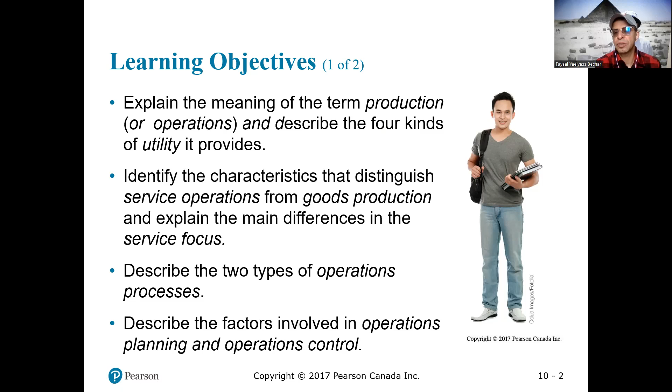Excuse me. We will describe the two types of operation processes. We're also going to describe the factors involved in operations planning and operation control. Further, we will be explaining the connection between productivities and quality. We try to understand the concept of total quality management, TQM, and describe the 9 tools that companies can use

to achieve it. And also we'll explain how a supply chain strategy differs from traditional strategy for coordinating operation among businesses. Now, creating value through production.

Operation management. It's a set of methods and technologies used in the production of a good or service. So it basically is a set of methods and technology used in the production of a good or service. Service operation, which is most of it in Canada, service operations are production activities that yield tangible and intangible service products. Goods production, on the other hand, is a production activity that yields tangible products.

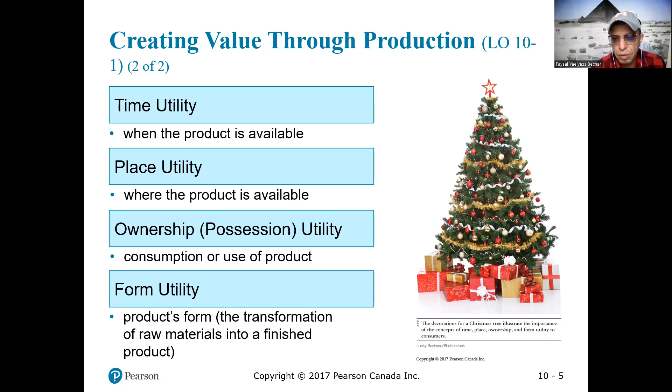Now, the difference between services and manufacturing operations: the level of interacting with the customer. Also, the service can be intangible and unstorable. The customer is present in the operation process. And also the service quality consideration. Intangibles make all the difference here, the service quality consideration.

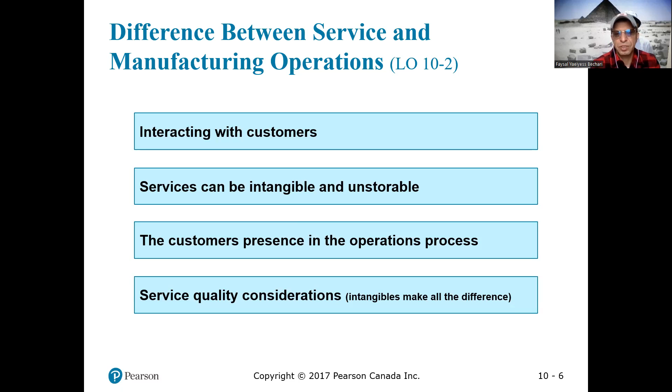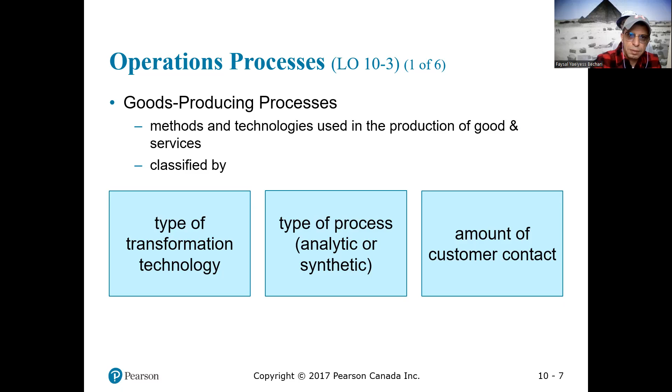In the operations processes, goods producing processes is a method and technology used in the production of goods and services, classified by types of transformation technology, type of process, such as analytical or synthetic, and the amount of customer contact. Now, the types of transformation technology we have: the chemical processes, the fabrication processes, the assembly processes, the transportation processes, and the clerical processes.

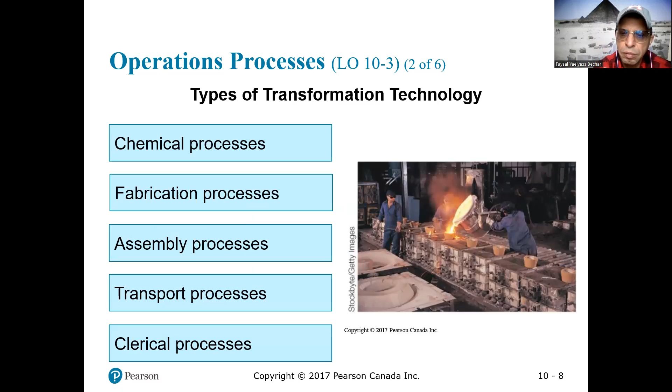But what's an analytical process? Resources are broken down in the production process, extracting minerals from ore, for example. Synthetic processes are where resources are combined in the production process, like paint production.

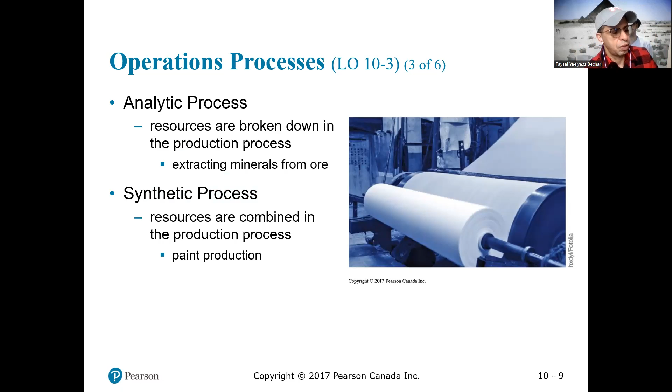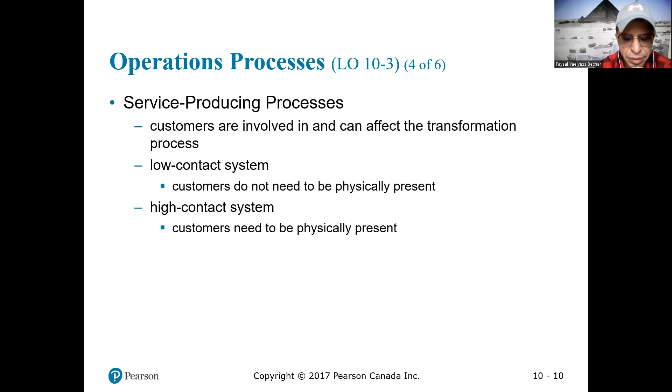You see here in the hairstyle operational processes, the hairstyle service being provided to this customer is classified as high contact, because he or she will be part of the operation, cutting hair and fixing up everything. This service also illustrates the three key features of service operations, which are intangibility, customization, and unstorability.

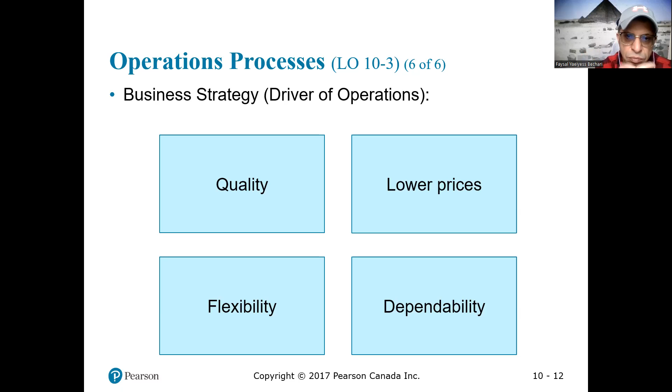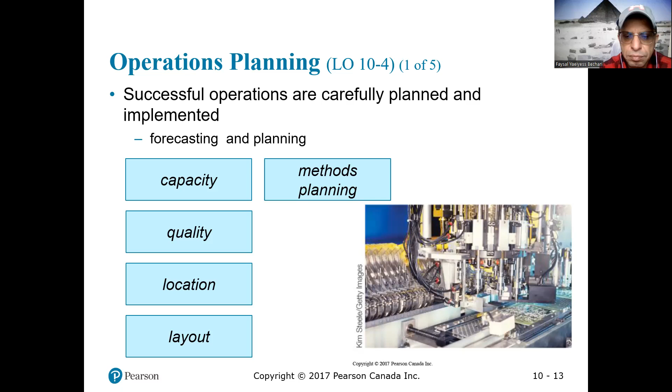Business strategy, which is the driver of the operation. It could be quality, lower price, dependability, and flexibility, or a combination of these. Successful operations are carefully planned and implemented, and they use forecasting and planning, usually, as you know, and they take into consideration capacity, quality, location, layout, and methods planning. I'll explain each one of them.

So in operation planning and control, you start with the business plan, as you see here, business plan and forecast, and then long-range operational plan like capacity, location, layout, quality, method. And then you start the operation schedule like master production schedule or MPS, detailed schedules, staff schedule, and project schedule.

And then you have operation control, which is quality control, materials management, and output to the customers. And then you would check that. And if you need further operations or further scheduling, the business adjusts according to the information fed back from output to the customer.

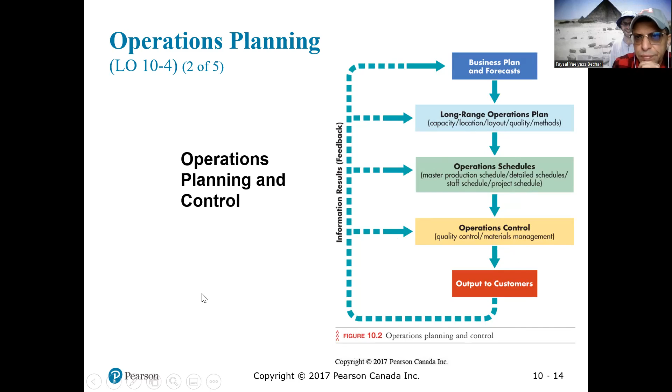Now, in capacity planning for goods and services, the amount that a firm can produce under normal conditions, that's the capacity. So the capacity always slightly exceeds the normal demand. It also accommodates seasonal changes and peak times, and addresses ways to use excess capacity.

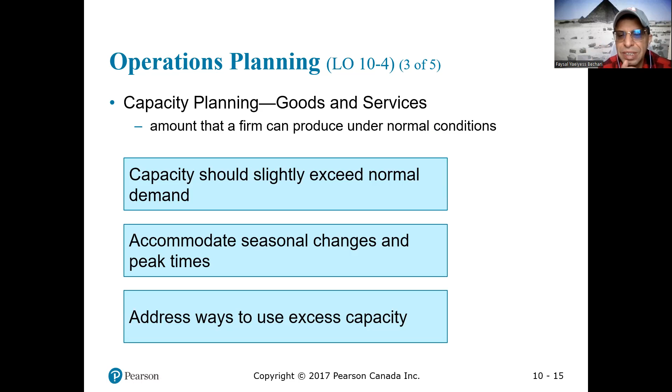Now, there is layout planning, which includes a process layout, where equipment and people are grouped by functions. And then you have a cellular layout, which is used when families of products can follow a similar flow path. And then you have a product layout, which is organizing equipment and people to produce one type of product, like assembly lines, industrial robotics, lean manufacturing.

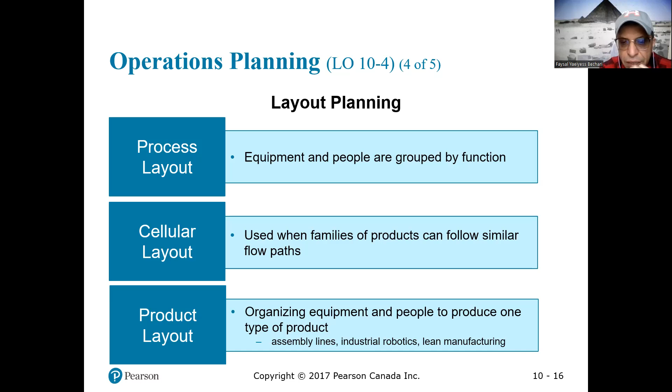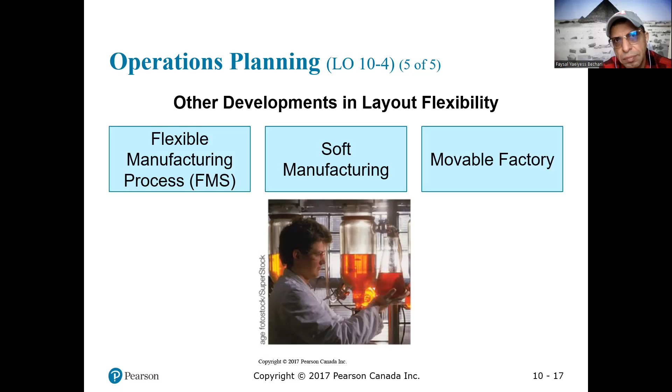Operation schedule. Scheduling goods operation, you need what you call MPS, master production schedule, on the top level, which indicates which product, when, what resources, and what time. Then the scheduling at the lower level, which is a scheduling service operation, which if it has low contact, is based on desired completion date and or arrival. And then you have high contact, where customer is directly involved, impacting the scheduling itself.

Now, the scheduling is always driven by or monitored through different charts. One of them is called the Gantt chart. It's a diagram of tasks in the project and time required for each task. Can be used to check the progress, and this is an example of a Gantt chart.

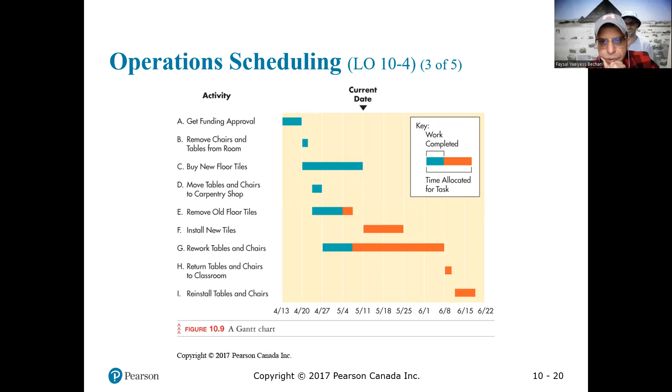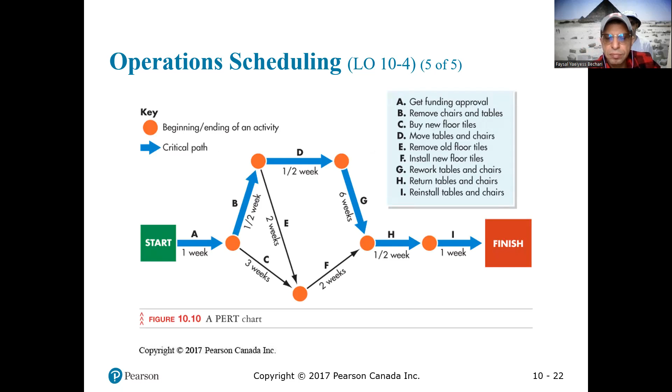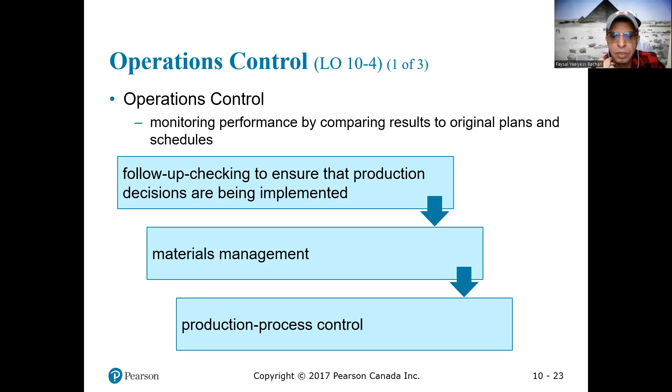Then what do you have? Operation control. It's about monitoring performance by comparing the result to the original plan, benchmarking and scheduling. That's done through follow-up checking to ensure the production decisions are being implemented, material management looking at it, and production process control.

The material management is about transportation, purchasing, inventory control, warehousing, and supplier selection. It's about planning, organizing, and controlling the flow of material from purchases to distribution of finished goods. And all of that is considered to be inventory, by the way.

Now the tool for process control, under operation control, is you provide worker training. You try to implement just-in-time production system everywhere, material requirement training on how to use these materials, and last but not least is the quality control or TQM. You seek TQM after the quality control.

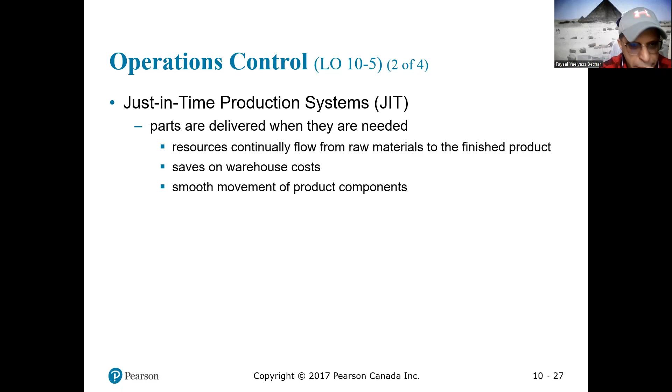Now, just-in-time or JIT production: parts are delivered when they are needed. Resources continually flow from raw material to finished product, saving on warehouse costs and smoothing the movement of product components. These are the three things we speak about.

Just-in-time production, we can see it done in Honda. It's a type of lean manufacturing that brings together needed material at the precise moment they are required for each stage in the production process.

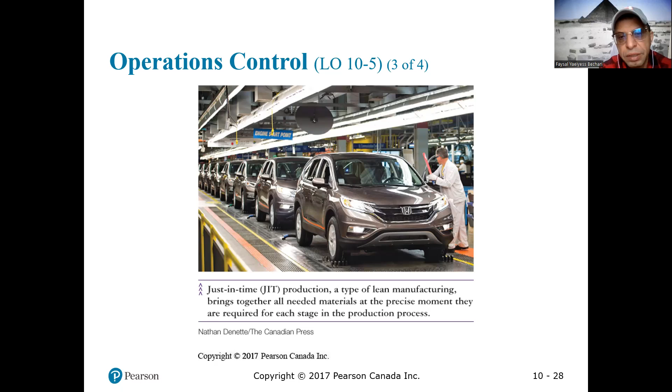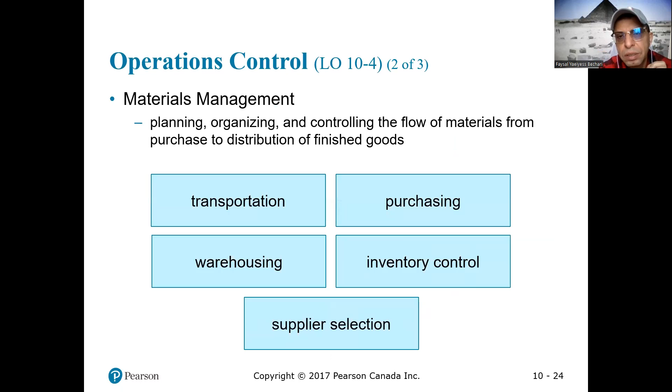Then you have what you call MRP, which is connected to the first plan, the MPS. MPS is integrated with MRP usually, and MPS is driven from the ERP.

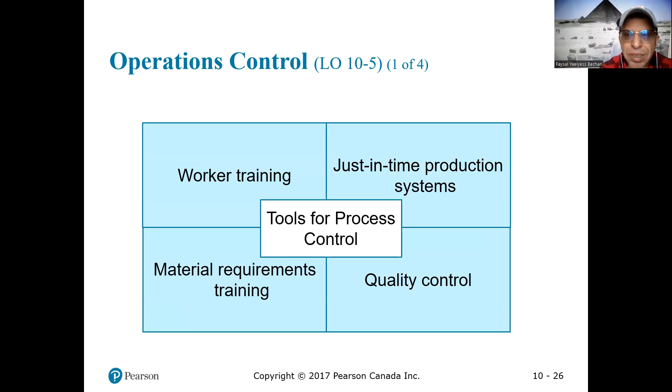Then you have the MRP, which is material requirement planning. It's a computerized bill of material for estimated production needs. This is really set up by the engineers. Resources are acquired and put into production only as needed.

That's the MRP. Then you have what you call MRP2, or manufacturing resource planning, which is different than material requirements planning. But actually all of them fall under one MRP. It's an advanced version of MRP and ties all parts of the organization into production activities.

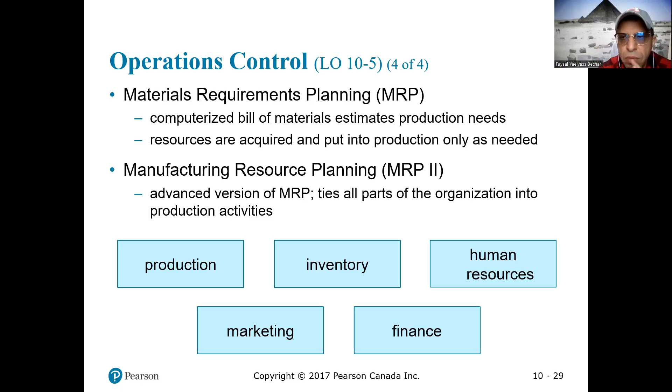So MRP takes into consideration the production. It's a scheduling in a way of production, inventory, human resources, marketing, and finance.

Then you have what you call quality. That is something we hear a lot about. A product's fitness for use in terms of offering the features that the consumer wants. That's what you call quality.

Measuring productivity is different from quality. Productivity is measured as a ratio of output to input. Often they use labor for input because the data is easily available. So for labor productivity, we use GDP, or gross domestic product, of how many produced divided by the total number of workers.

Now you have what you call domestic productivity. Domestic productivity affects the standard of living, like employee wages, investor profit, and customer prices.

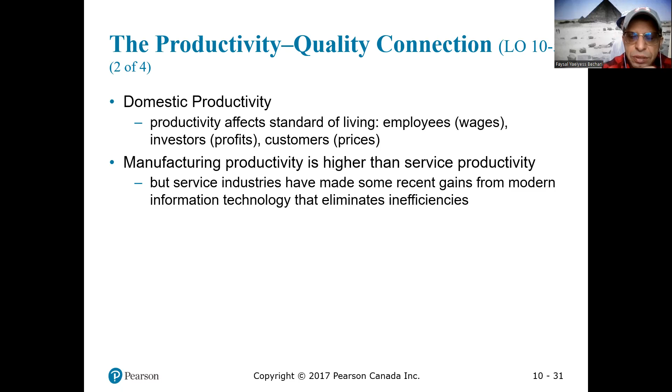Manufacturing productivity is higher than service productivity in general. But the service industry has made some recent gains from modern information technology that eliminate inefficiencies. Here we look at

Many jobs like this are outsourced to service suppliers in India because workers there receive lower wages than their North American counterparts, used to be. This translates into higher productivity since the costs are lower doing it. This is true, but when you reach higher consultancy and high-end consultancy, it becomes almost the same prices.

Productivity between industries differs widely. Agriculture, computers, steel gained from new technology. There are different productivities, impacted by labor union negotiation, investors, and suppliers. These are all things we can discuss regarding the effect on productivity.

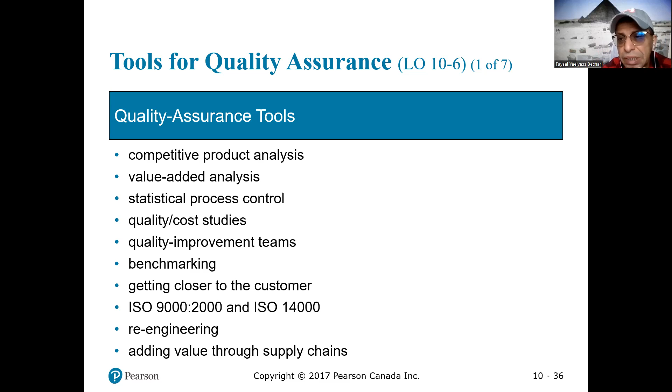Now there are different tools for quality assurance, like competitive product analysis, value added analysis, statistical process control, quality cost studies, quality improvement teams, benchmarking, getting closer to the customer, ISO 9000, ISO 14000, re-engineering, and adding value through the supply chain. These are all quality assurance tools.

In value added analysis, for example, we're looking at an evaluation process to determine the value added by all work activities, material flow, and paperwork. It also reveals and eliminates wasteful activities. So we evaluate all these three steps, then reveal and eliminate the wasteful activities.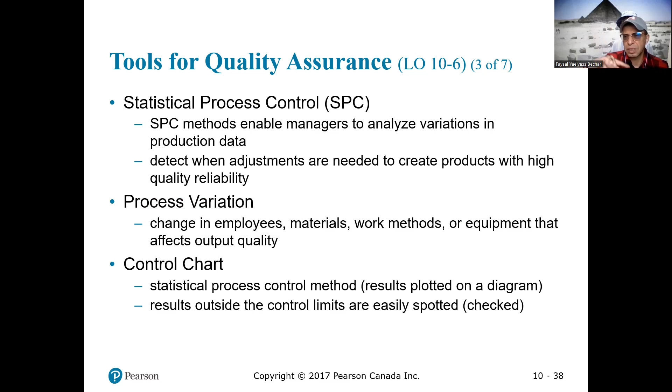And then you have the control chart, which is a statistical control method where results are plotted on a diagram, and results outside the control limit are easily spotted. So there's a control limit and a spot on it that's outside the limit.

Continuing with tools for quality, we have quality cost studies, which assess quality related costs and identify areas with cost saving potential. Quality costs are associated with making, finding, repairing, or preventing product defects. This requires determining the cost of internal failure and external failure — what costs occur after production if something fails on-site or off-site.

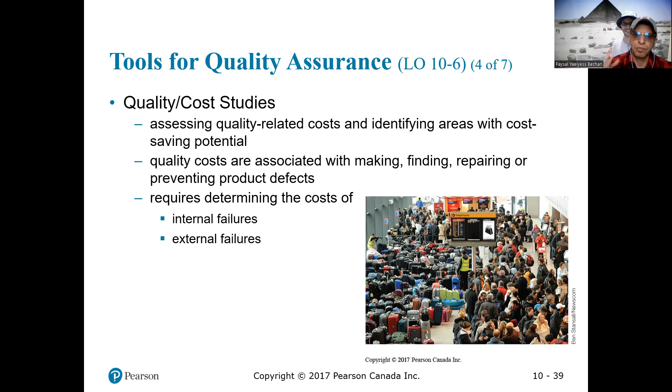Now what do quality improvement teams do? A group of employees from various areas meet to define, analyze, and solve a quality problem. Basically, their goal is to improve work methods and products. This is very applicable in Germany a lot. It may involve brainstorming, discussion, and the use of quality cost studies that the company collects.

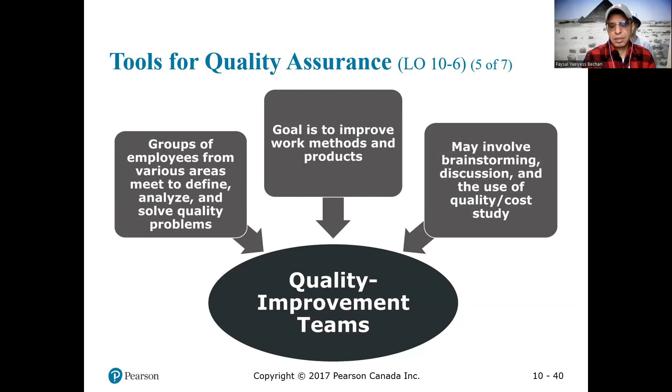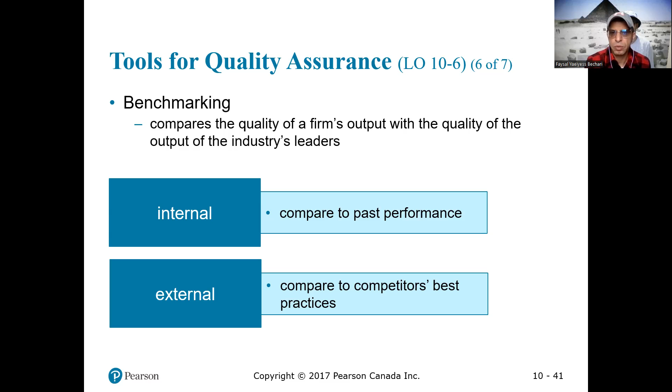Then you have benchmarking, which is an important field for analyzing. In benchmarking, you compare the quality of a firm's output with the quality of the output of industry leaders. Now there's also internal benchmarking, which compares to past performance, and external benchmarking, which compares to competitors' best practices.

ISO 9000, ISO 14000 is basically product testing, employee training, record keeping, correcting, and it's used to earn rating for firms, measured by a qualified consultant, or it can be done personally within the company. It's a program certifying that a company meets the rigorous standards of the International Organization for Standardization, ISO.

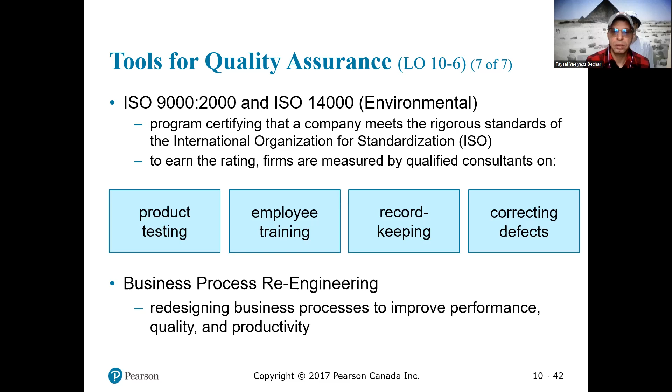Then you have business process re-engineering, which is redesigning business processes to improve performance, quality, and productivity. Then you have the supply chain, or value chain — in that process you add value through the supply chain. You look at the supply chain and try to add value. It's a group of companies and a stream of activities involving getting the product from raw material to the end consumer. That's the supply chain.

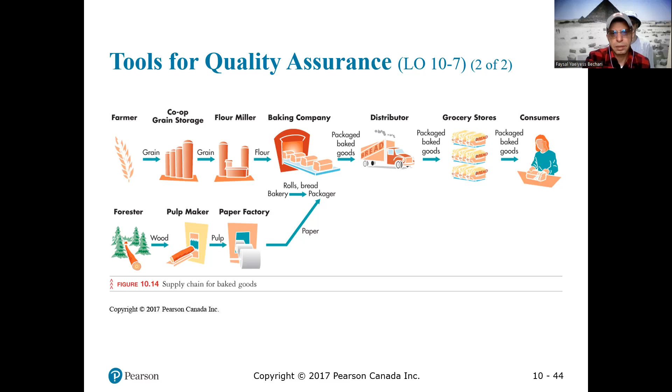We can take a look at this. In supply chain management, it offers a competitive edge because companies are working together to improve the flow of goods. The customer gets a better value, smooth flow of accurate information, reduced unwanted inventories, and materials move faster to business customers and consumers.

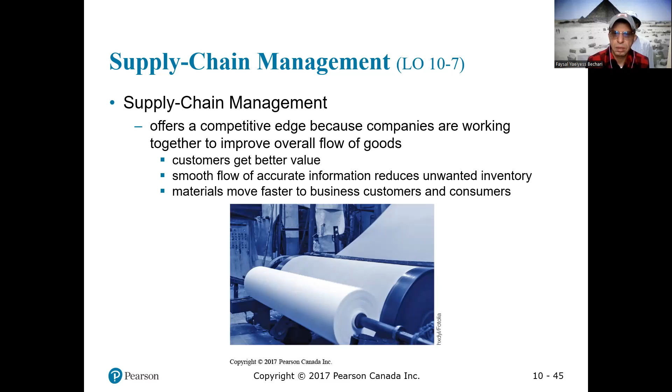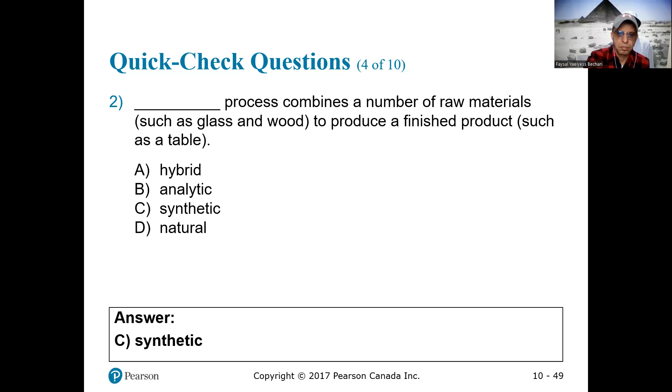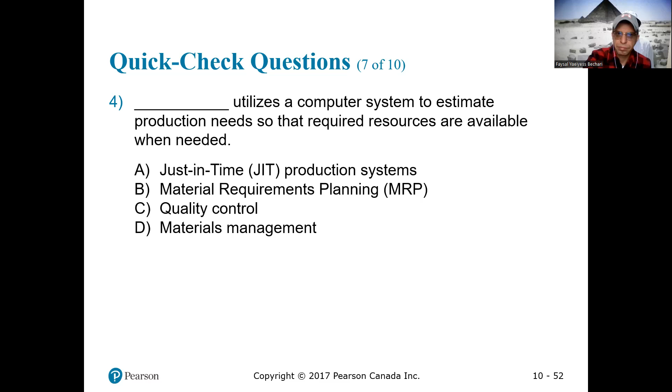Which one utilizes a computer system to estimate production needs so the required resources are available when needed? That should be an easy one. Your answer? MRP.

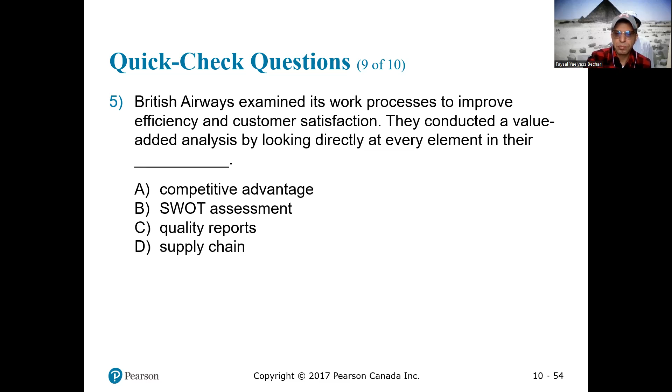Well, British Airways examined its work process to improve efficiencies and customer satisfaction. They conducted a value-added analysis by looking directly at every element in their... competitive advantage, the SWOT assessment, the quality report, or supply chain? Your answer is supply chain. Thank you, guys.

And this is the end of the chapter.